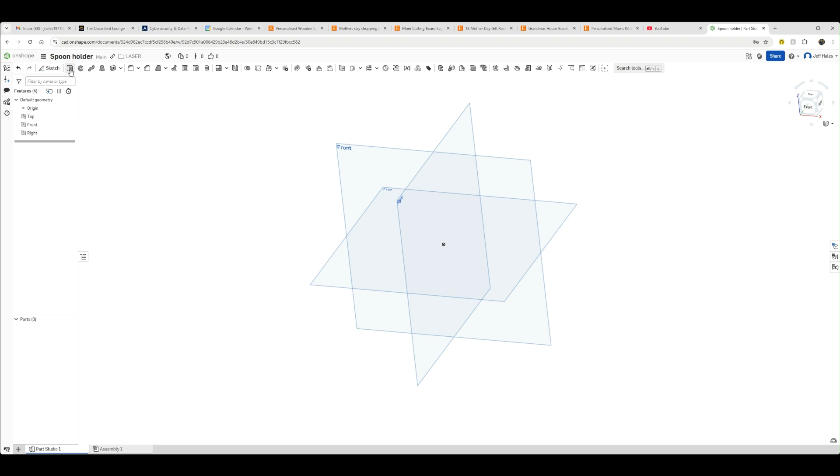Okay, so we're back in Onshape and I've created a new document for our spoon holder. So let's see if we can make something that's a little bit more effective than trying to stick a vise into a laser cutter. So we'll start off. We'll create a sketch on the top view, and I think what we should do is create something that's kind of longer and narrower, so we can always kind of ensure that the spoon lines up onto the x-axis.

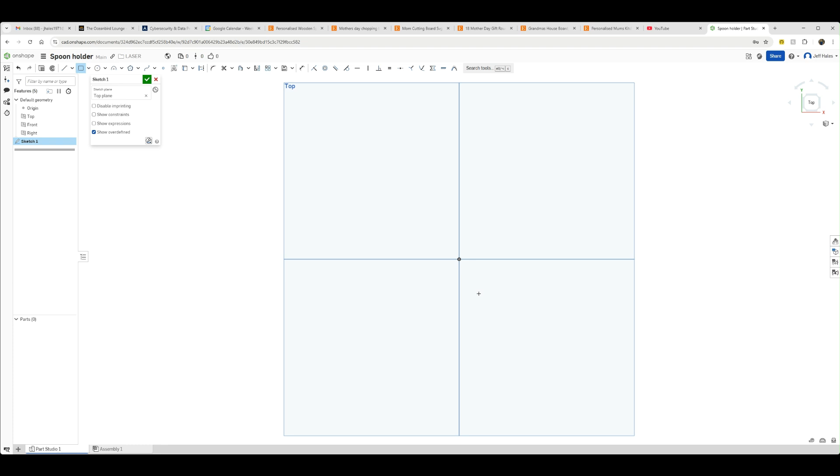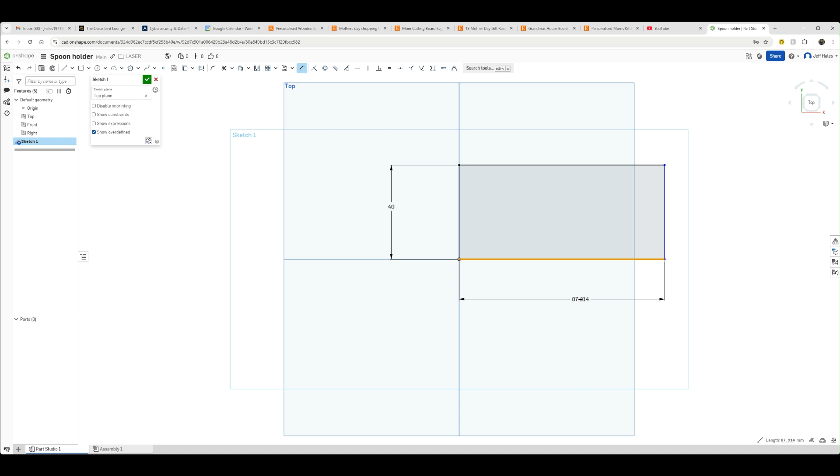So okay, I think the spoon's fairly narrow anyway, the handle, as we saw taking the measurements, so we'll probably do it just 40 millimeters deep, and if you're going to go over 4 of those slats, they're 21.5 millimeters, with a 5 millimeter gap in between, so 106. I think that sounds about right.

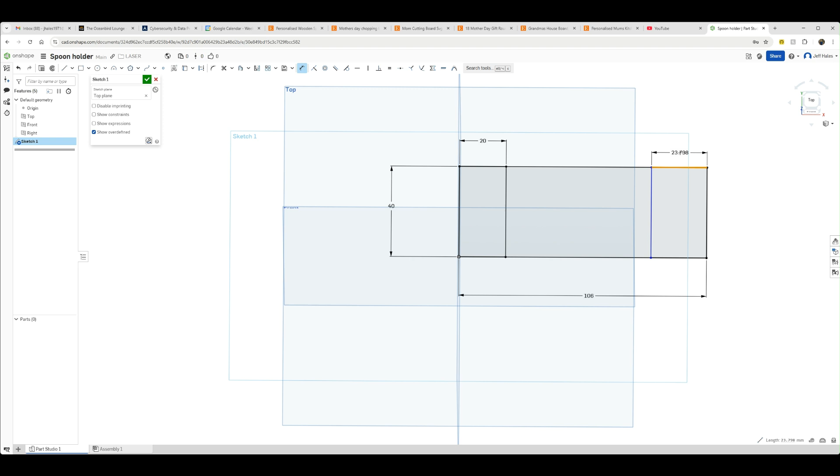Now what I'm going to do is create a block, but I don't want to just create a big chunk of plastic with a hole down the middle of it. I think we only need a block on either end just to hold the handle of the spoon. So let's create those. I think we'll just do those as 20 millimeter blocks on either end. So again, we're not wasting material just for the sake of it. There we go, so 20 millimeters.

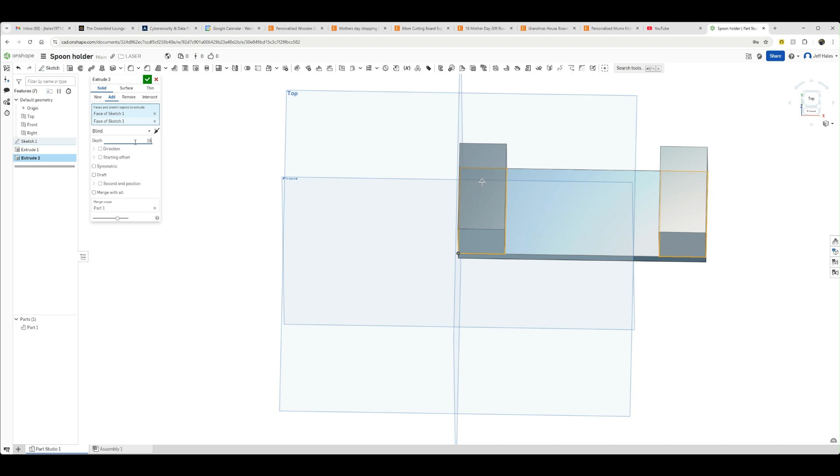Okay, so let's create a base first. So create a base of 5 millimeters. Let's bring that sketch back, and then if we make the whole thing 20 millimeters, that'll be 15 millimeters then here. Okay, all right. So we'll just drill a hole now through the middle here. So let's create a new sketch on this face, and probably go down 9 millimeters.

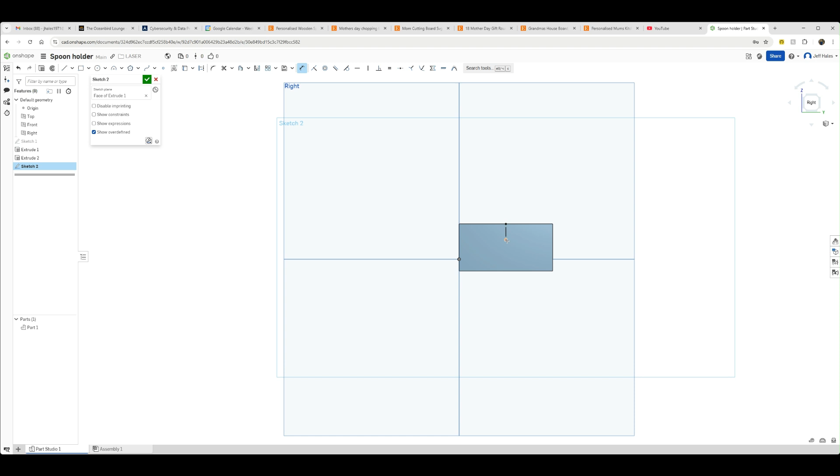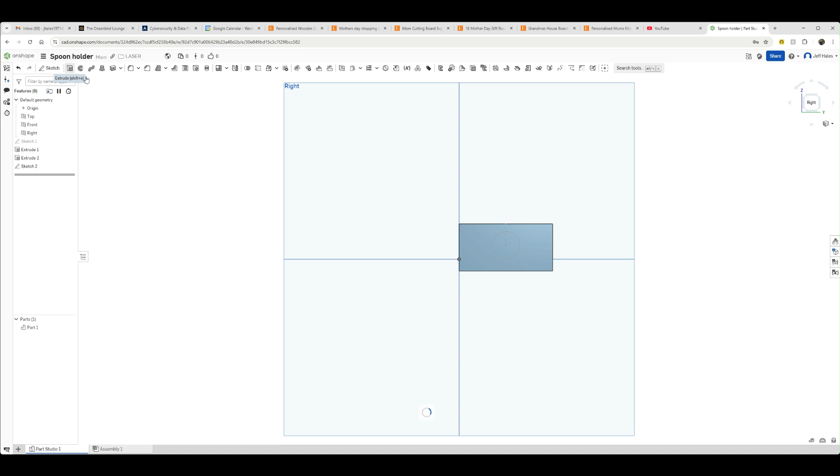And then we'll add the hole that the spoon handle is going to go through. So it's about 11.6. I mean, it's not completely cylindrical, but I think that's close enough. And then let's punch that hole all the way through. So I'll say 106. Yep. Okay. That'll do there.

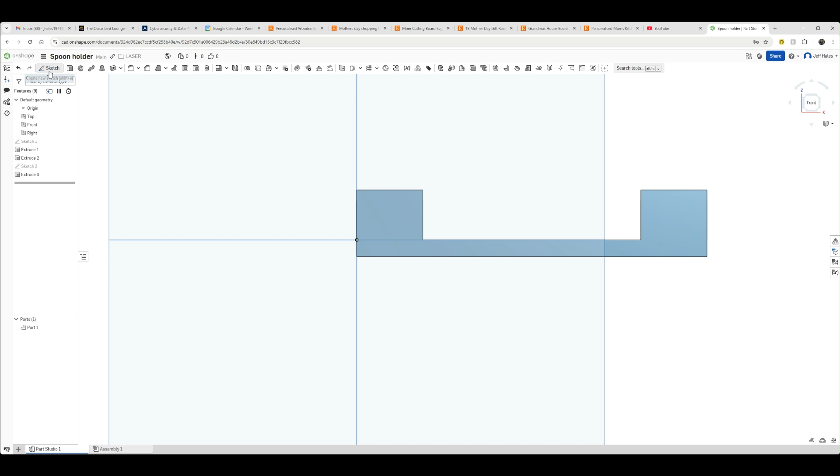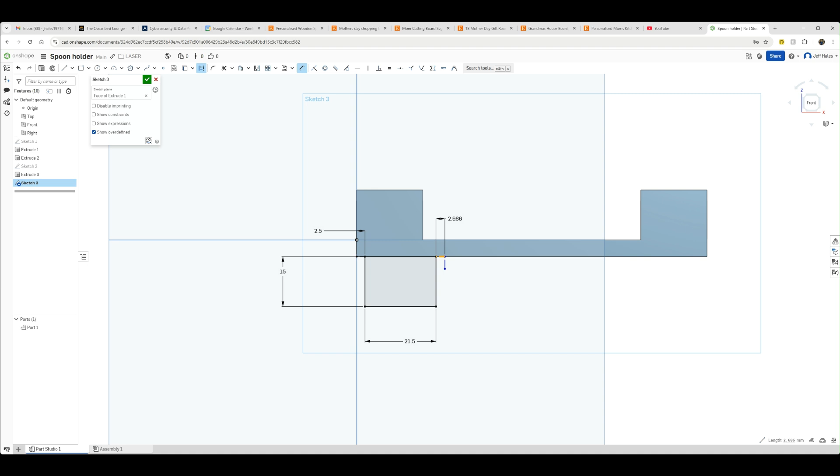So now let's put the little fingers that slot down between the slats. And what I'd quite like to do is have it so that we can have different fixture pieces going in next to each other. So let's start off, create a sketch on this face. So we'll go in 2.5 mil. And then create the block, so it doesn't need to be too deep. And we know it is exactly 21.5. And as you know, because I'm a little bit lazy, I'm going to use mirror once I've created something that I like here.

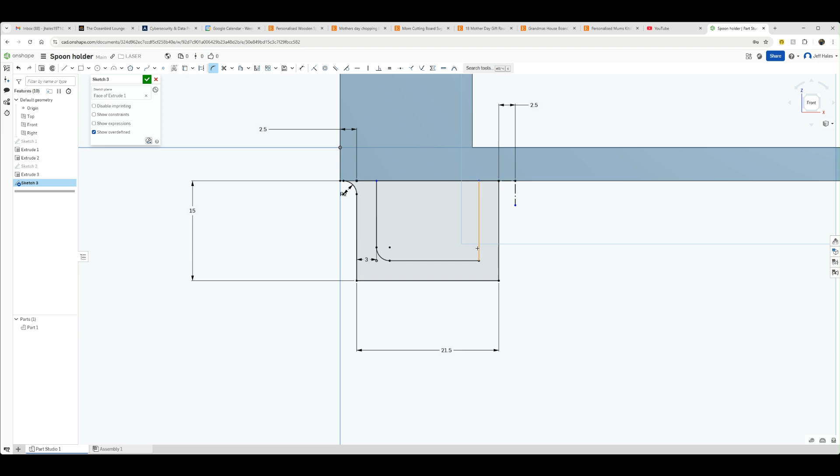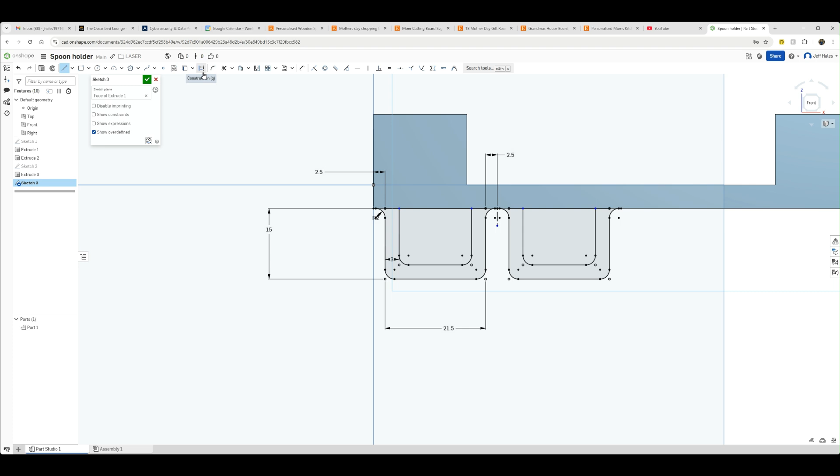So we don't need an entire block of plastic here. So let's use the offset function. We'll just offset by 3 millimeters. Okay. And then we'll give it a little bit of strength. Yeah. Okay, that looks nice. Then we use mirror. Use this as a mirror line, and then we want to mirror all of that. And then we'll finish it all off. Create another construction line just here. And then I think we can, again, if we select that, we mirror the entire thing. Ah, there we go. That made it a lot easier.

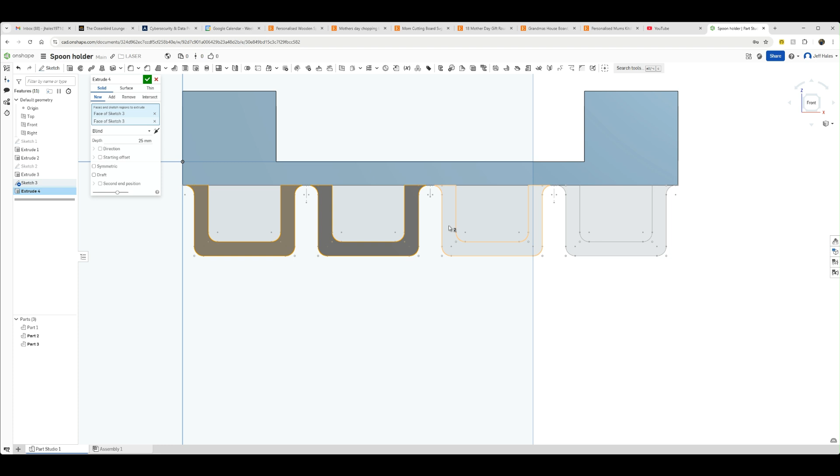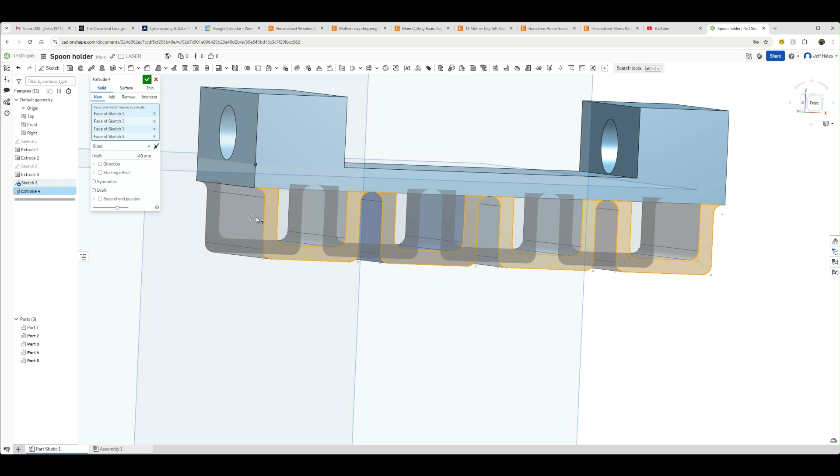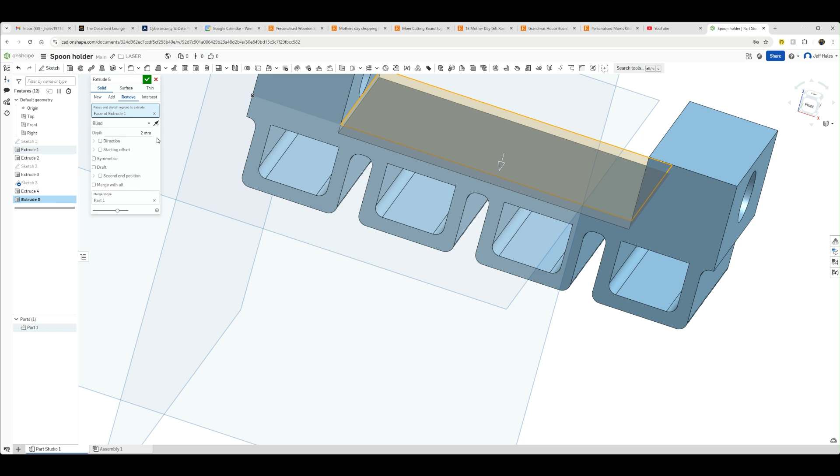And now let's add those. Oops. Dear me. Add those there. Okay, so that looks quite good. The top part's a bit chunky, perhaps. Let's maybe lower that by 2 mil. Yeah, that looks nice.

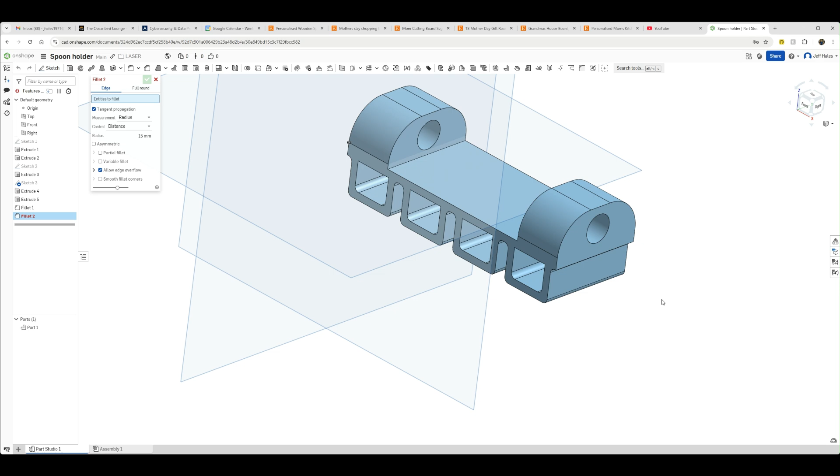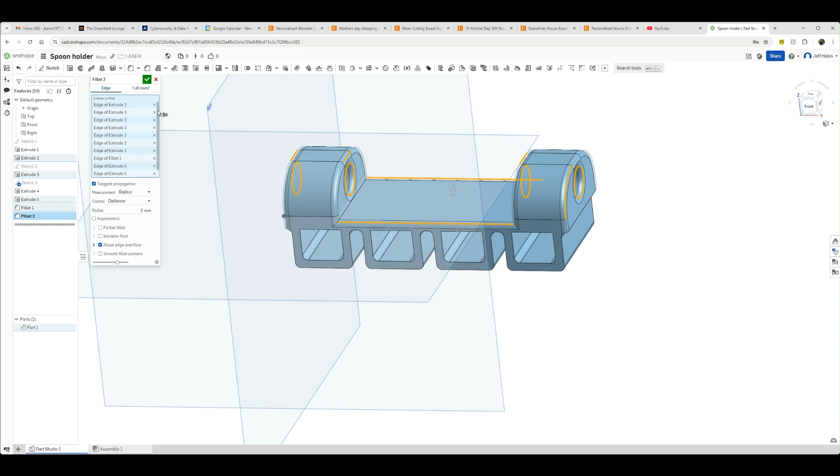And then these edges look a bit sharp, so let's put some nice fillets on these, I think. 15mm should look good. Yeah, and now let's tidy everything else up. That's not going to be 15mm. Okay, so I think that looks good to go.

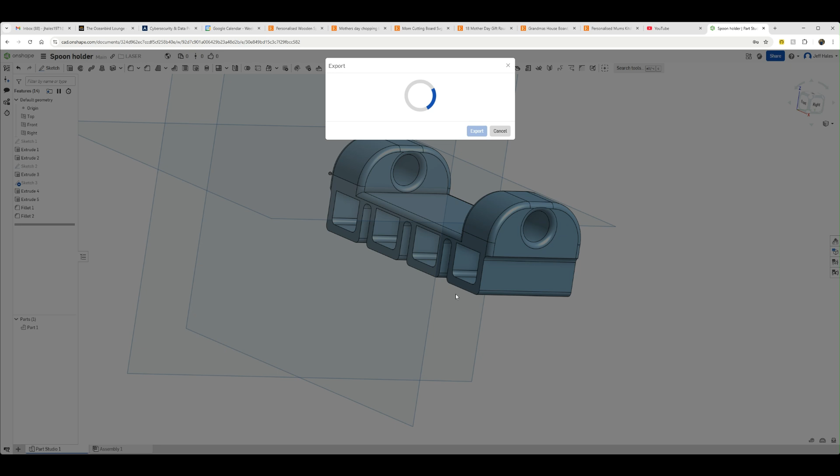Right, so just export this so we can put it in Bambu Lab. So we'll call it spoon holder. Okay, so over to Bambu Studio then. Let's import the spoon holder into here.

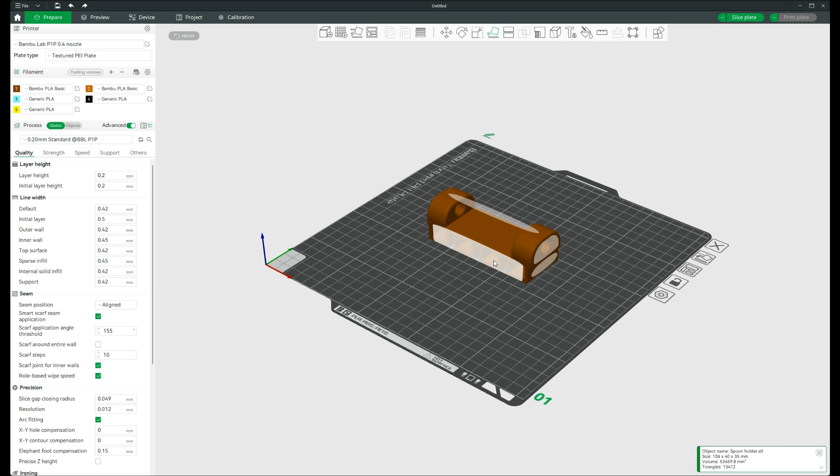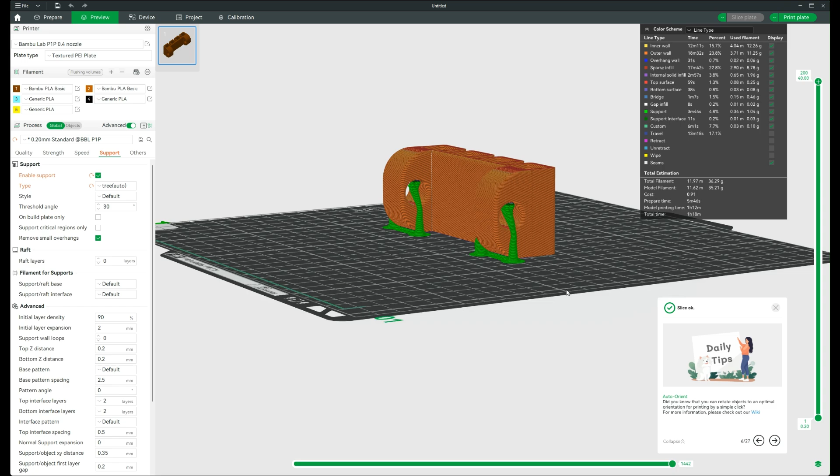Okay, so we need to print this. We don't want all those overhangs in there. There's going to be some overhangs. So we'll print it on this face, I think. And yeah, then we'll just add some support for those. So we'll go in, I think we use the auto for the tree. We've got it selected for PLA, which is good. So we'll slice that. Okay, that looks good. So it'll take an hour and a quarter.

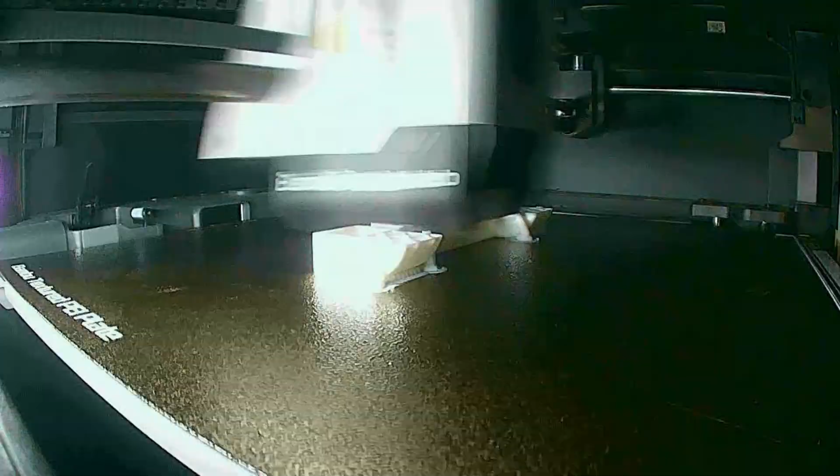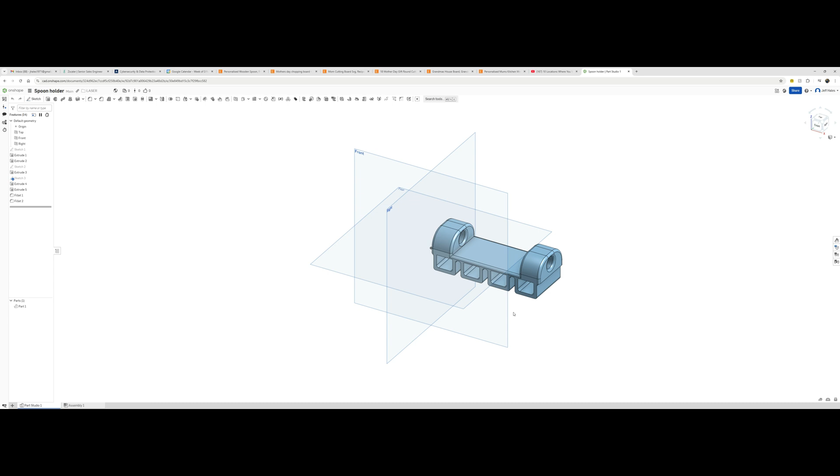Okay, well, that didn't quite work, so a little bit too tight to be useful, although we definitely held the spoons in place. So let's go in and edit it. And that's the cool thing when we're using CAD - we can go in and change the things that aren't quite right. So we need to change the diameter of this hole.

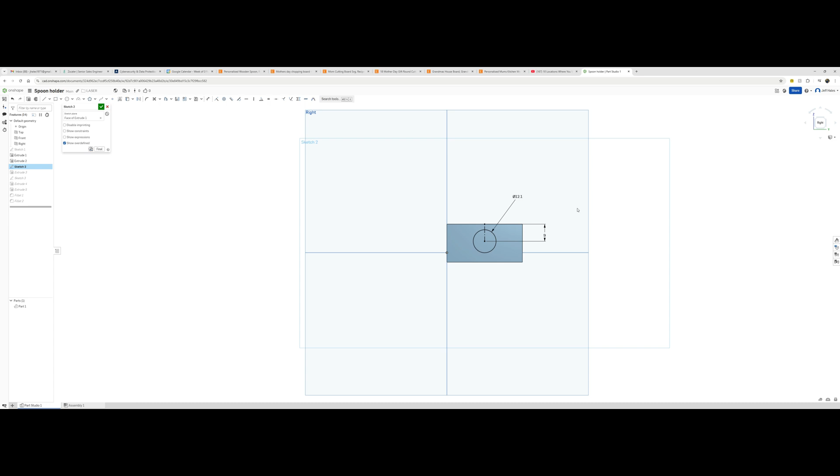If we edit sketch 2, there we go, we can go in and change this. So let's take it from 11.6 up to 12. We still want it to be - in fact, let's go 12.1. It'll be too loose now, but let's see. So this is 12.1. I think also what I'd quite like to add is some sort of reference mark.

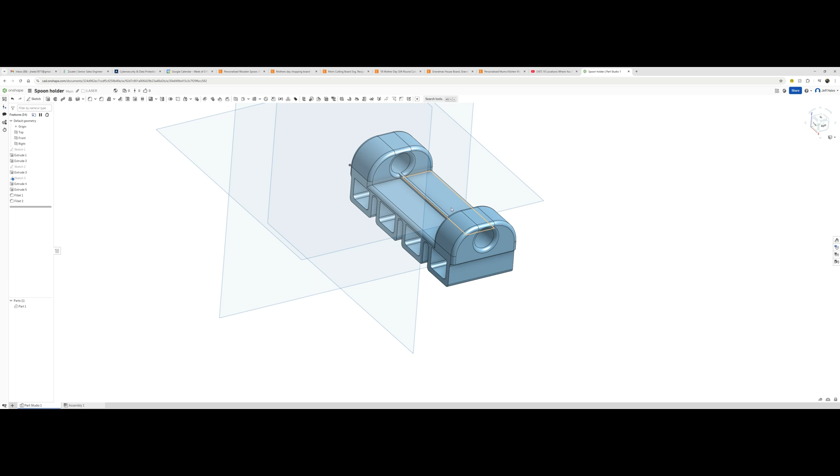Some sort of reference mark to the top here, so that when we look at it with the cameras and the laser, it's easy to see where the center line is. So it's going to aid alignment. Let's just create something on the top here.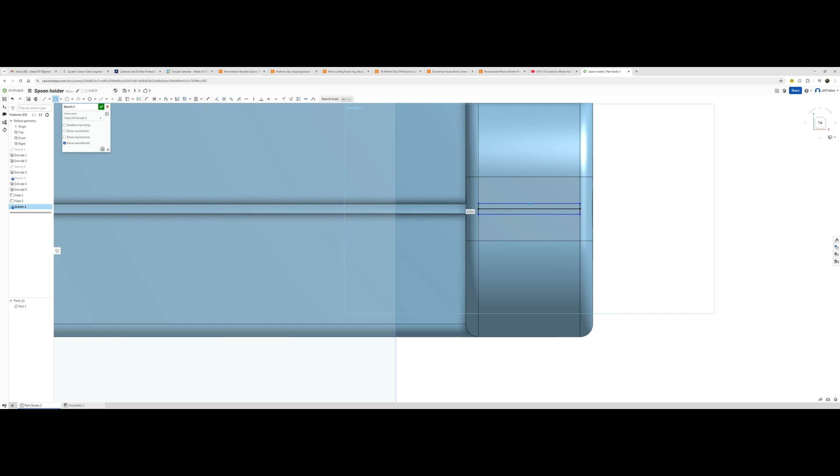So create a new sketch. Okay, so again we can see that center point. Let's just be lazy. I think if we just create something that's just a millimeter in total, there we go, really lazy here. So let's expand this by 0.5 mil. I want to extend this by 0.5 mil.

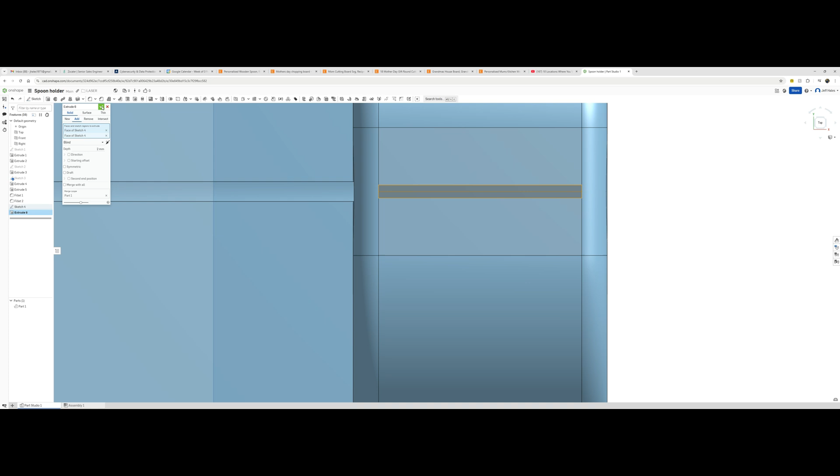Now, I could, if I was being particularly keen, let's take this up by 2 millimeters. If I was being particularly keen, what I could do is stop the print part way through if I was printing in a different orientation, and then print this in a different colour. But I think I'll go old school, and once it's printed, I'll just use a black Sharpie to fill this in. So let's put a chamfer on this.

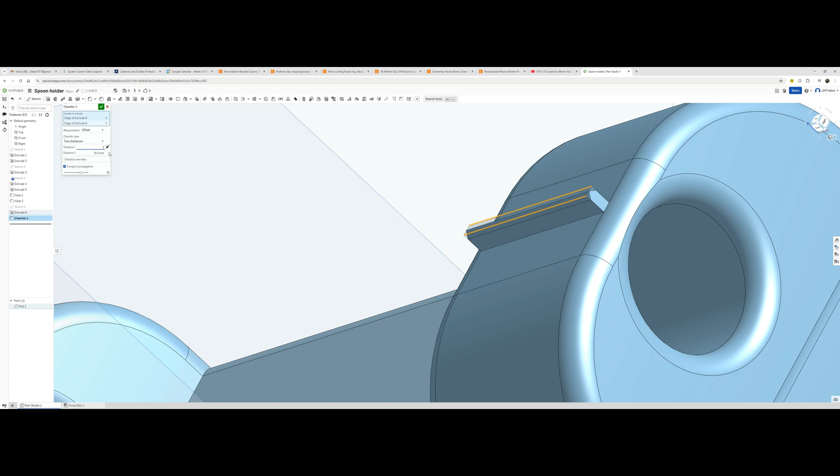What I want to do, so it's only 0.5 - oops, no, 0.5 by 2, 1. Why is it doing it like that? Okay, let's stop that.

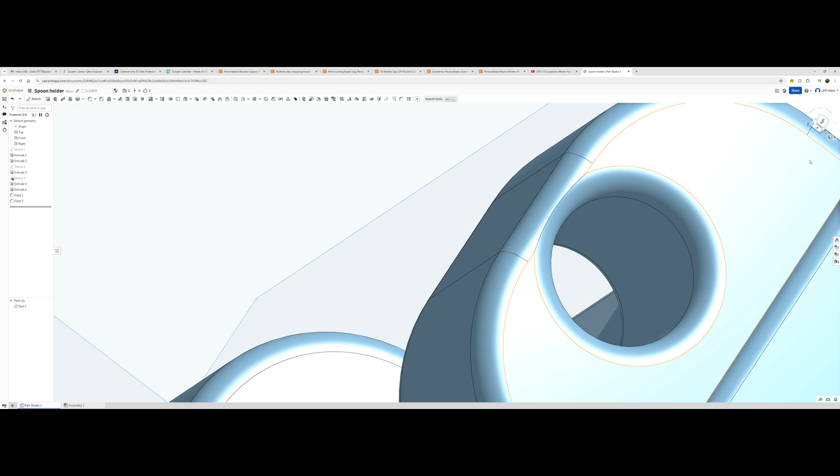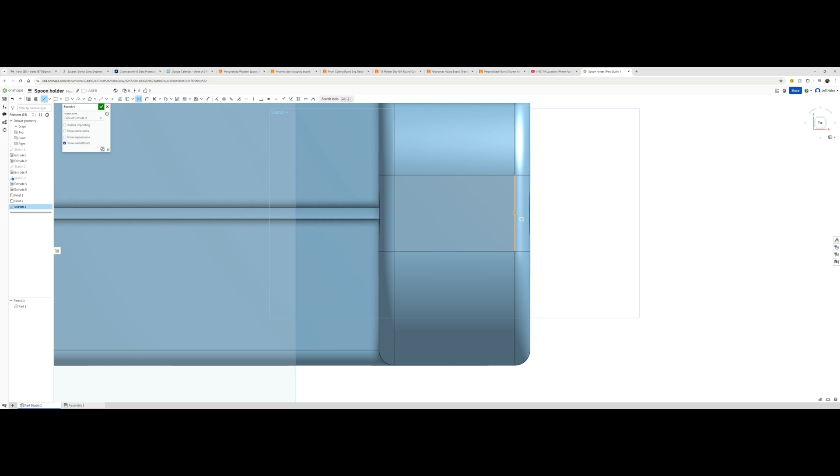Okay, so what I want to do is add some sort of reference mark on the top as well, just to make it easier for aligning with the cameras on the xTool. So we'll create a new sketch, and we'll just do it on one side - we don't need to have it on both sides. Let's just do a quick line, from this center point, and I only want to do it a millimeter.

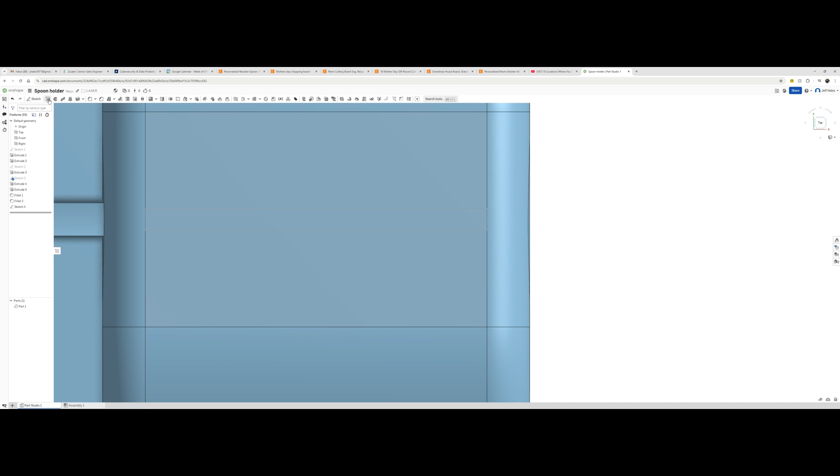So if I put an offset from that center line by 0.5 mil, and then just create this in - if this is 1 mil, then the center of that will be exactly in the middle. Okay, and then we'll just extrude it. And if we were printing this in a different orientation, it'd be pretty cool, because we could stop the print at this point and change the filament, then print this in a different color. But I'm printing in white PLA, so I can print it out and then color it in with a black Sharpie, and that's going to be good enough.

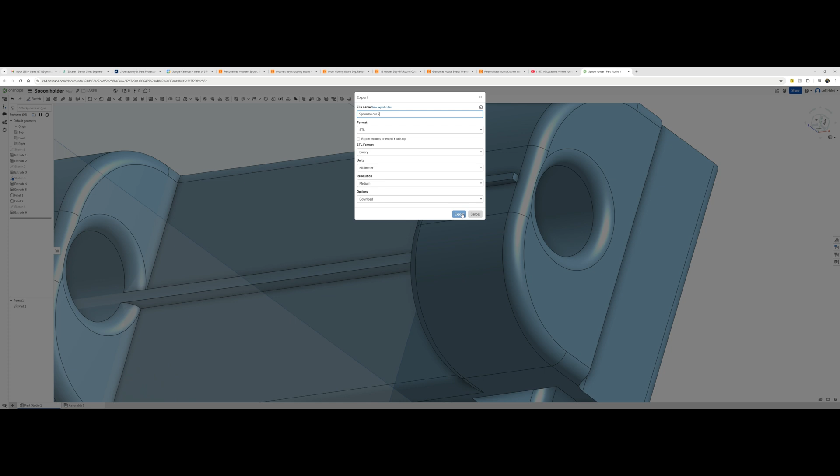So again, let's just export this. I'll call it Spoon Holder 2. Okay, so I won't show you it in Bambu Labs - I'll just print it, and here it is.

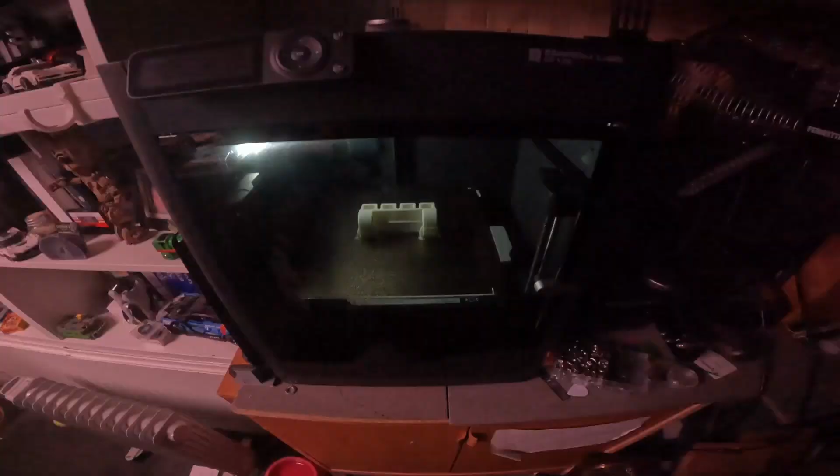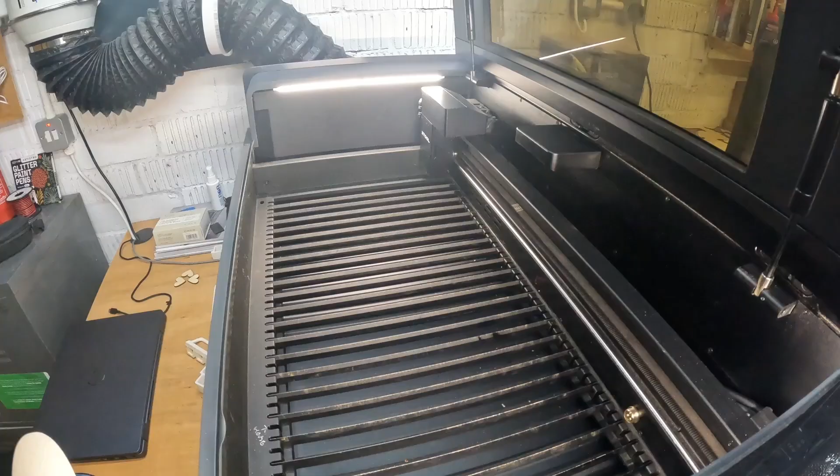Okay, let's see - second time lucky. Let's see if it fits. Okay, so it's all done. That's pretty good.

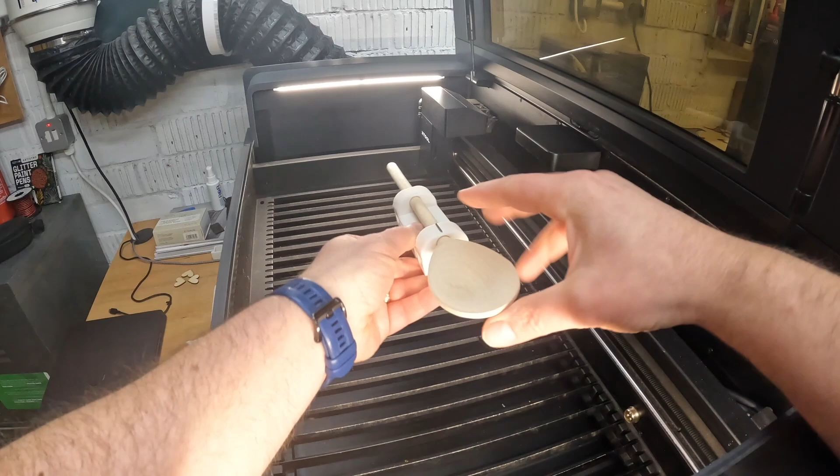See, I've coloured in the little alignment line just to make it easier. Now hopefully the spoon's a little stiff, which is good. Oh, there we go, which is good. It fits straight in. So I think that works pretty well, and it aligns easily into the laser.

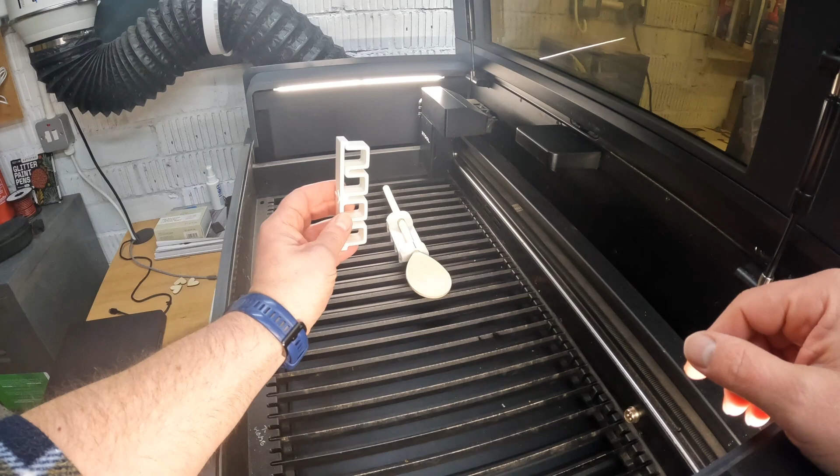And if we use some of the alignment blocks that we created earlier, we can always put those in there, and then we ensure that we can have easily repeatable engraving. So we can now easily take out that fixture for the spoon, put a new spoon in it, and stick it back in exactly the same place. You don't have to do repeated alignment each time. So I guess now we'll engrave the spoon.

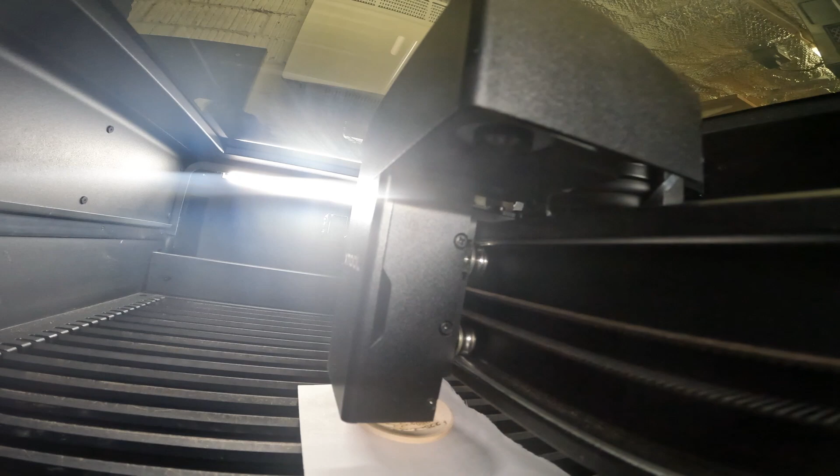Okay, it looks pretty good. I think the next step now is to turn it over and engrave the other side.

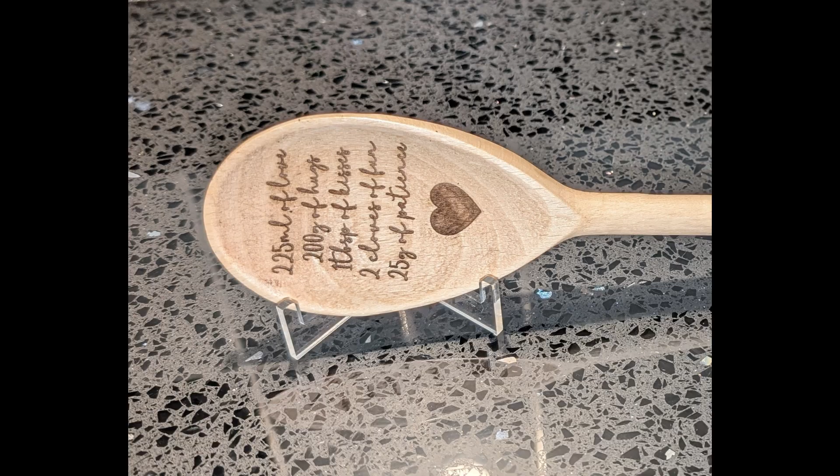Well, I think the spoon holder worked, did everything it needed to, kept the spoon still, and I think the spoon looks good.